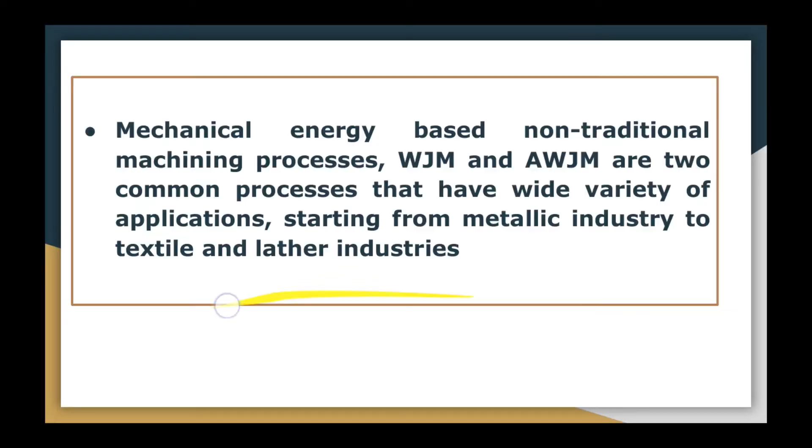If we talk about the working principle of water jet machining, clean water is pumped to a high pressure up to 2500 to 4000 bar with the help of an intensifier, and then pressurized water is delivered to the work surface in the form of a jet using a small nozzle. This nozzle converts the pressure energy of water into kinetic energy, producing a high velocity jet up to 1000 meter per second. Apart from delivering the water jet, the nozzle also maintains the desired delivery angle and nozzle tip distance (NTD), or stand off distance (SOD), to avoid flaring of the water jet after discharge. A suitable stabilizer is sometimes mixed with the water.

In water jet machining, the high velocity water jet erodes material from the workpiece, which is the material removal action. This method is suitable for cutting leather, textile materials, food, polymers, etc. However, the water jet does not possess enough power to slice metallic or ceramic objects. This is the summary of water jet machining.

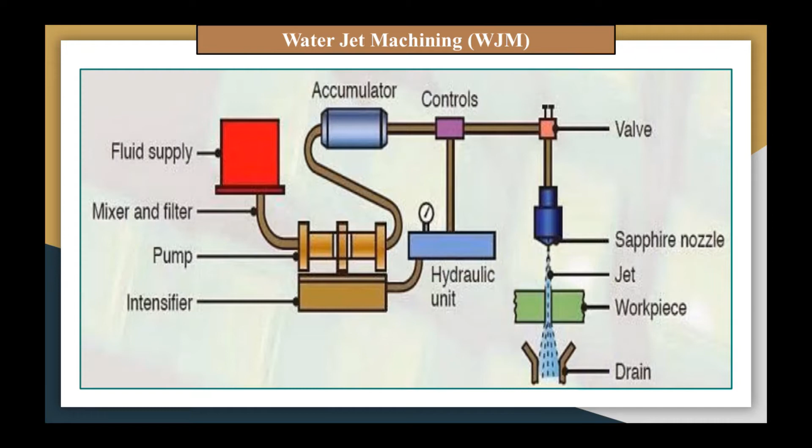Here I have shown the basic diagram of abrasive water jet machining. Water is used to entrain the abrasive and to flush away eroded material. Water does not directly participate in the micro cutting of the material, that is, the material removal action. The abrasive alone erodes the material. This point should be noted.

Although abrasive water jet velocity remains more or less the same as that of pure water jet, the power and cutting ability of abrasive water jet is significantly higher. Accordingly, abrasive water jet machining can be employed for cutting metals and ceramics also. However, due to chances of contamination because of the abrasive, this process is not hygienic for application in food industries.

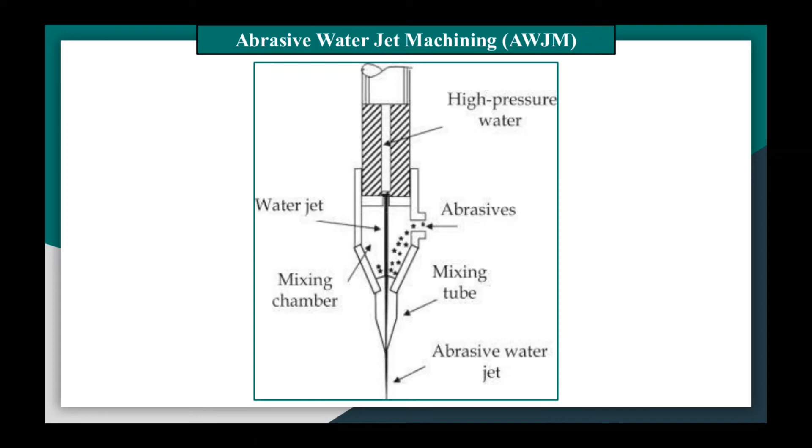Now there are various similarities between water jet machining and abrasive water jet machining. Let us focus on this. First, a pump and intensifier are required in both processes, to elevate the pressure of the water.

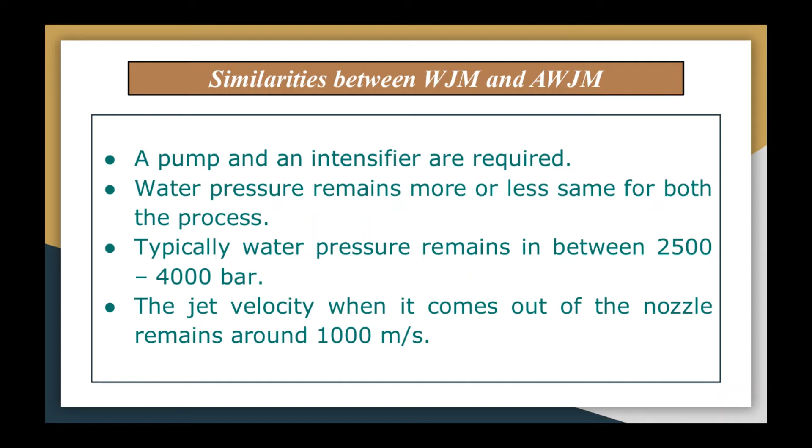Water pressure remains more or less the same for both processes, typically between 2500 to 4000 bar. The jet velocity when it comes out of the nozzle remains around 1000 meter per second for both processes. A catcher is also required in both cases, as it absorbs the residual velocity of the jet after machining the workpiece.

Also, it protects the work holding devices from the erosion action of the jet.

Then a nozzle is desired in both processes for what purpose? To convert the pressure energy of either water or water abrasive mixture into kinetic energy with the help of the nozzle. So the nozzle is desired for both processes.

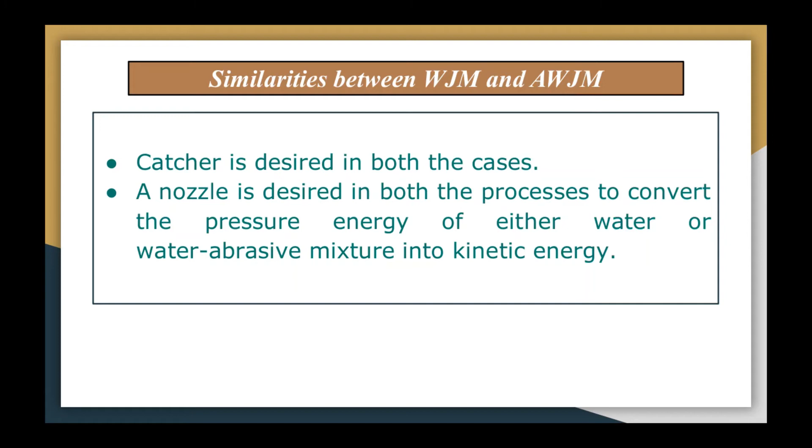This nozzle delivers the high velocity jet in both cases. It also directs the jet towards the work surface by maintaining the appropriate stand-off distance and discharge angle. So these are the similarities between water jet machining and abrasive water jet machining.

Let us discuss the differences between these two processes. Here I have made two columns. In one column you will get the points regarding water jet machining, and in the second column you will get the points regarding abrasive water jet machining.

So the first point is about water jet machining. In this process, a high velocity jet of pure water is used for the erosion action, to erode the material. Sometimes this pure water may be mixed with a stabilizer.

In case of abrasive water jet machining, a high velocity jet of water abrasive mixture is used for erosion of the workpiece material.

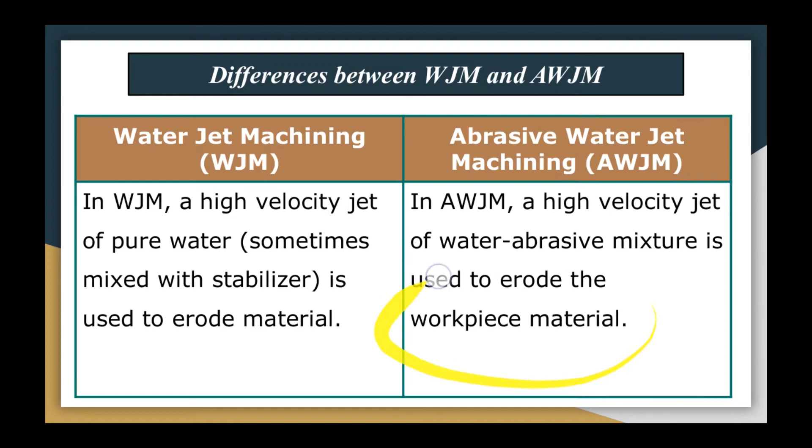Second point: material removal from the workpiece takes place only due to the erosion action of the water jet. This is about water jet machining. In case of abrasive water jet, material removal takes place due to micro cutting action of abrasive particles. Here water does not directly participate in the process of material removal.

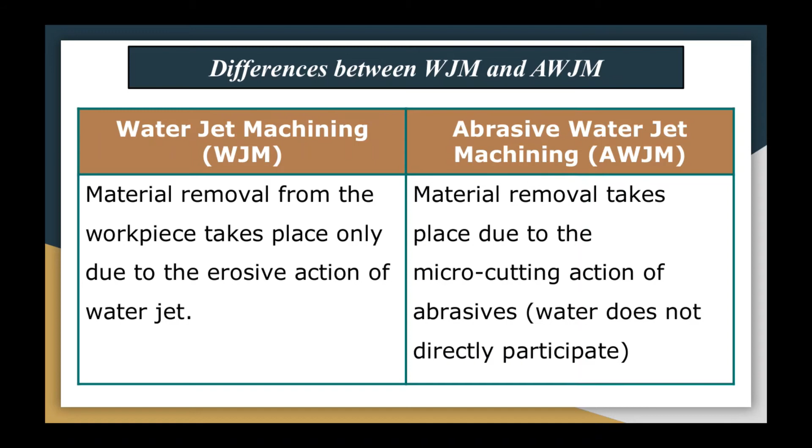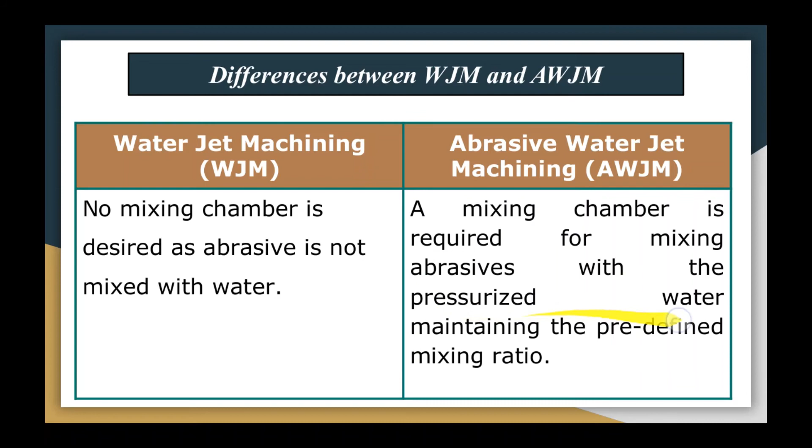In case of water jet machining, no mixing chamber is required or desired, as abrasive is not mixed with the water. But in case of abrasive water jet machining, a mixing chamber is required for mixing abrasive with the pressurized water, maintaining a predefined mixing ratio also.

In case of water jet machining, a jet of water does not possess high power, and thus it cannot be advantageously applied for cutting metals, alloys and ceramics. This is a drawback we can say.

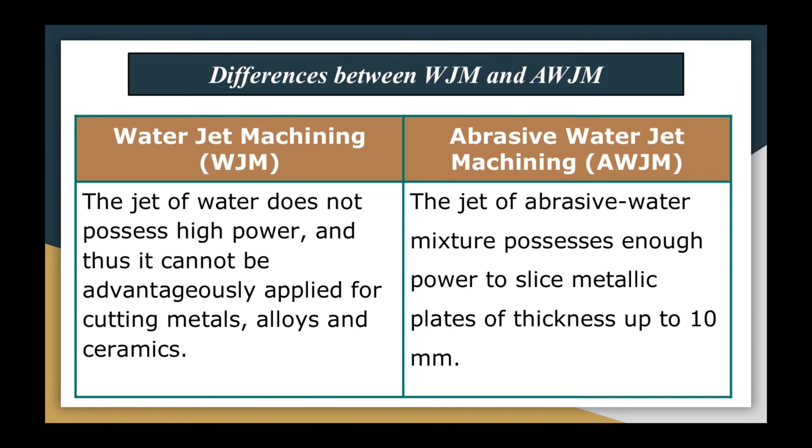In case of abrasive water jet machining, the jet of abrasive water mixture possesses enough power so that it can slice metallic plates of thickness up to 10 mm.

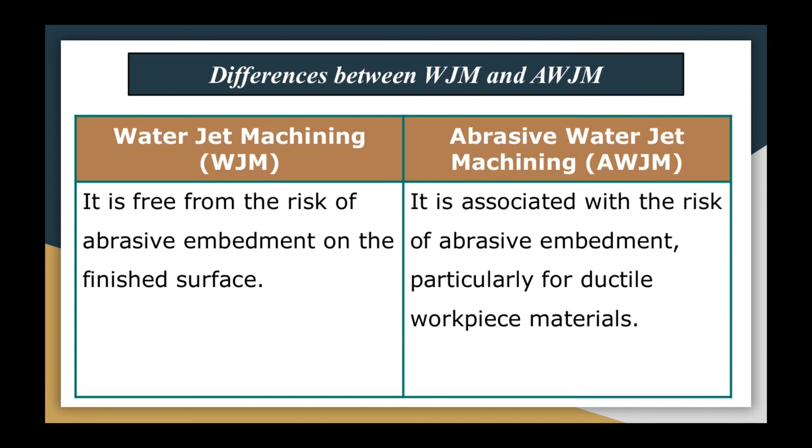In water jet machining, it is free from the risk of abrasive embedment on the finished surface. But abrasive water jet machining is associated with the risk of abrasive embedment, particularly for ductile workpiece materials.

Water jet machining is suitable for cutting softer materials like wood, leather, polymer and food items. Also, this water jet machining is used for cleaning and removing coatings.

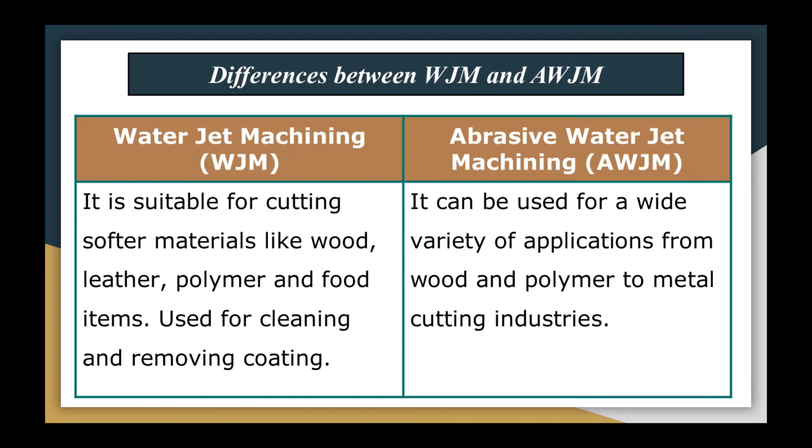Abrasive water jet machining is used for a wide variety of applications, starting from wood and polymer to metal cutting industry also. Also, water jet machining can be employed in food industries for slicing food items like frozen meat, fish, etc.

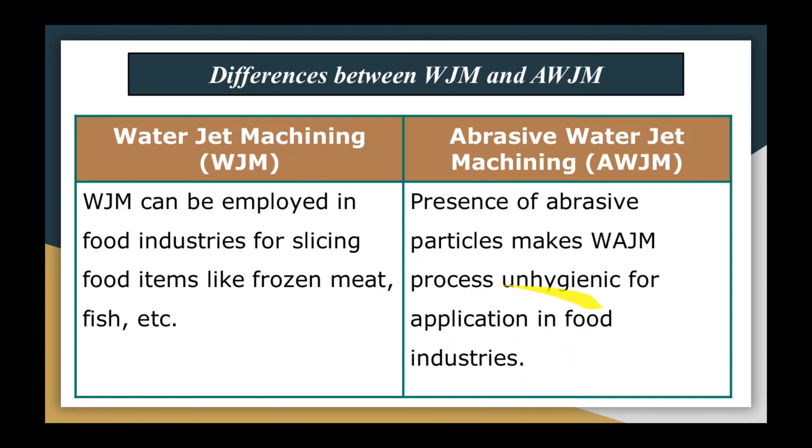Abrasive water jet machining has the presence of abrasive particles, so this process is unhygienic for application in food industries. So here I have given the summary about the differences.